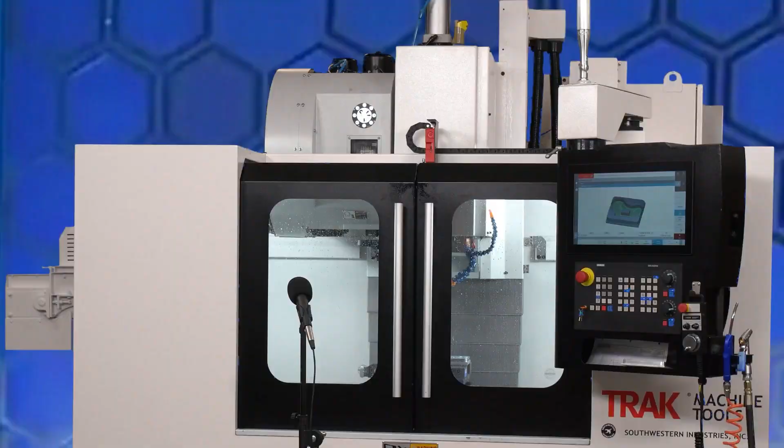We've now reached the start of round 20. If you spell this next word correctly, we will declare you the National Spelling Bee champion.

It's a noun. It's from an originally German word. The word is SINUMERIK.

SINUMERIK. SINUMERIK. That is correct. Congratulations, you are the National Spelling Bee champion.

The storm is coming.

Welcome to the TRAK video event. I don't know how these machines work, but I'm going to introduce you to people who do. Do you mind?

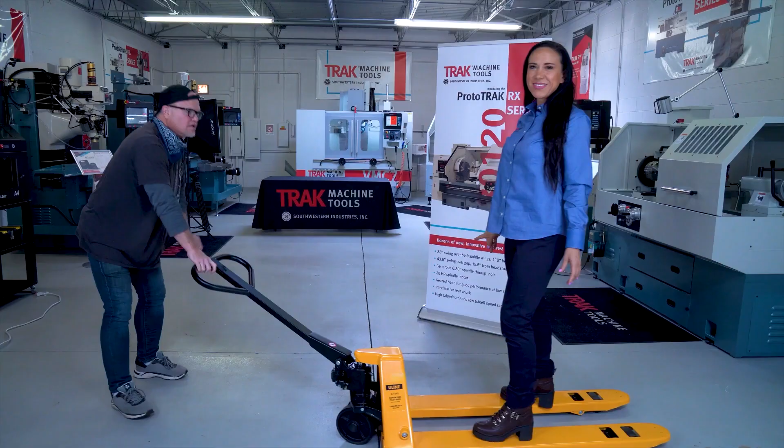Introducing the TRAK VMCsi, featuring the all-new SINUMERIK ONE by Siemens. The world is changing.

From a features and capability standpoint, specifications, the customer is getting a product of tremendous value, and from the time it hits his floor, he will be working with excellent production control with outstanding productivity features. So the customer gets immediate value, and value far into the future. Honestly, I can't say that it makes sense to buy any other product.

I was initially shocked when I heard we were teaming up with Siemens. Traditionally, TRAK has always, from start to finish, made our own products.

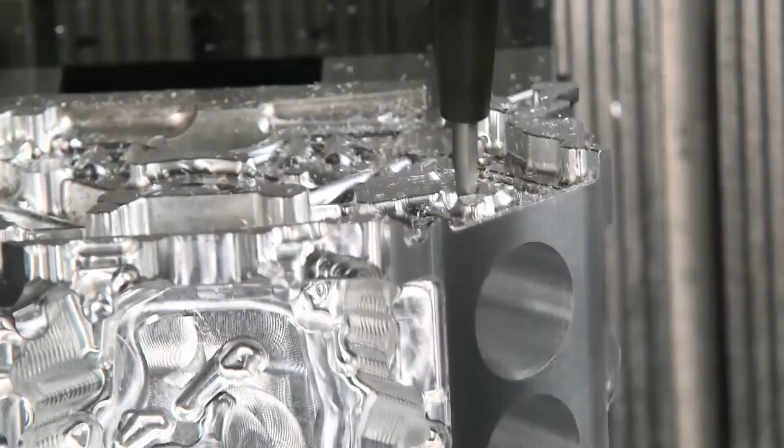When I first found out that we were going to develop and sell VMCs and turning centers with the Siemens control, it was a very exciting time. It was exciting, number one, because it was part of the growth plans that we had had, but more importantly, it allowed us to give our customers a full complement of products, from tool room to production to technology adoption.

The first time I heard it, to be honest with you, I was like, well, what are we doing that for? We have a great control system. We've spent a lot of years developing it. We're all very proud of it. We don't need Siemens. But then I came to understand the market we want to move into is very competitive.

There's a lot of new technologies there. And yeah, we can probably get there, but it might take us 10 years to get there, and we can't wait 10 years. Having that partnership now really opens up a lot of doors for us.

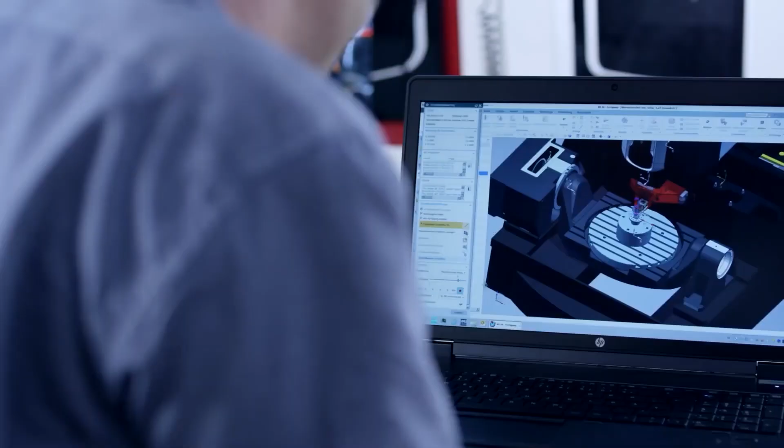Siemens brings to the table the platform - the hardware, the software, the connectivity, the cloud computing - so all that's within the Siemens platform. It's going to be up to us to take that platform and write specialized software from our perspective for our particular market segment, and also create machinery to take advantage of all that.

We at TRAK look up to Siemens as a leader in transformative technologies. Can you tell us about Siemens' vision for manufacturing? Yeah, so our vision for the future is we want to really embrace digitalization and embrace the digital thread.

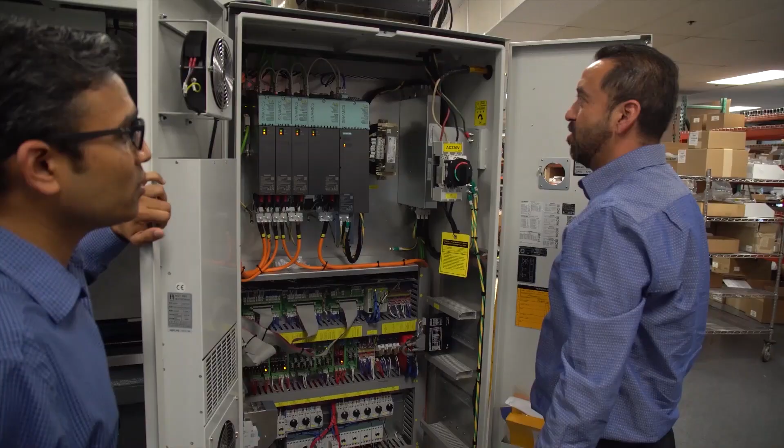It's been an excellent teamwork, excellent collaboration between my team and between Steve's team, coming together really with a mindset to get it done and to meet all the milestones of this project and get these machines launched.

Working with the TRAK engineering team is very rewarding. They're smart guys, eager to learn. They know all the right questions to ask. Siemens as a company, they embrace innovation. So there's always progression, always moving forward in terms of where technology is going.

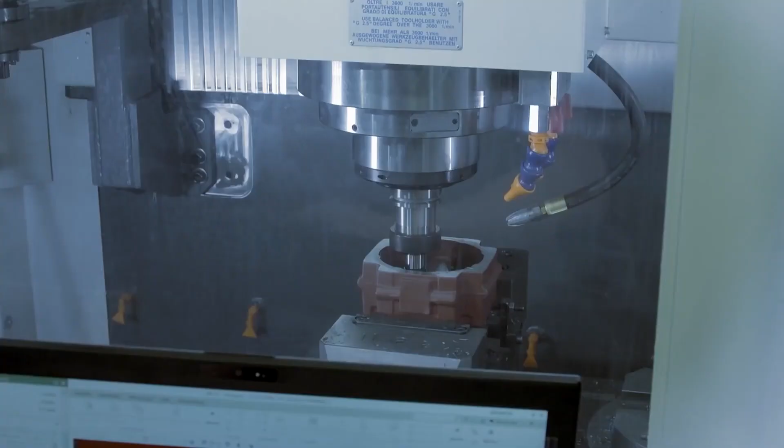So we're a very big global company, over 385,000 global employees. Here in the US, we have around 60,000 employees, around 80 to 100 billion in revenue every year. We've been around for 160 plus years, and we're a company that thrives on technology.

The interactions that I've had with Siemens so far have been positive. They have an extremely talented organization, a wealth of knowledge. I think it's gone very, very well.

Siemens is a big organization. They've got a lot of engineers, a lot of resources, and so I've gotten the chance to work with a number of them. Very smart people. They've helped us along the way, educating us on what their product's all about.

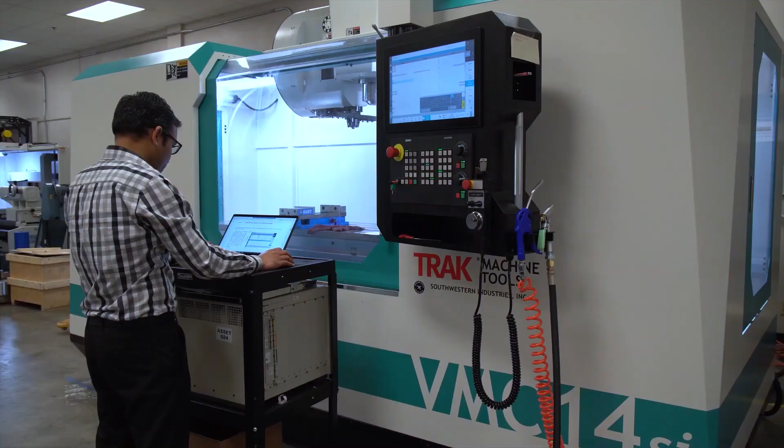I actually had a number of discussions with TRAK 18 years ago, and this partnership between TRAK and Siemens really brought the best out of both companies. To have Siemens backing is tremendous. They're a giant in the industry. I don't know if there's a better partnership we could have.

Back in the late 70s, we transformed our production machine shop from manual machines to CNC machines, and in that process we got an enormous increase in productivity. A few years after that, it became apparent that while we got that productivity in our production area, our tool room area—we had 5 tool room machinists at that time—their productivity had gone nowhere.

They were using the same equipment they had been using 30 years prior. We and our customers face a future where the world looks very different than it does today. It doesn't take a lot of imagination to see that the changes we've seen in photography, music, and retail—these huge disruptions changing those industries beyond recognition—these changes are headed for manufacturing.

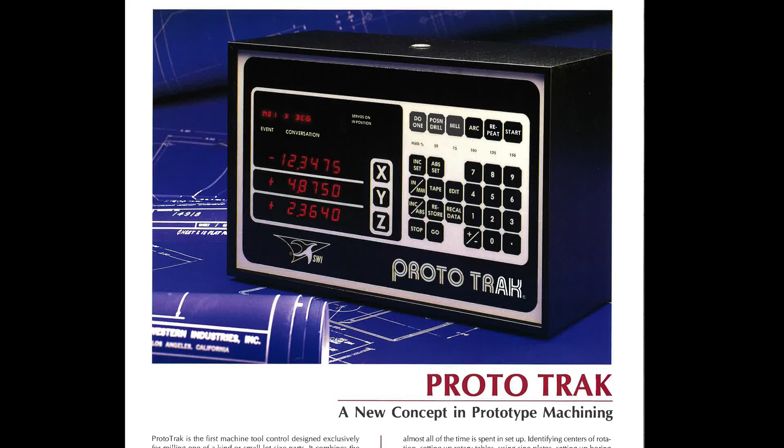What we did was take the CNC technology that had become common in production areas and simplified it, made it much less intimidating to skilled machinists who were mostly in their 50s and 60s, to be able to utilize and embrace it. What parallels to that innovation apply to the initiatives we're talking about with new technology?

What is needed today, and what we can provide, is a transition from the CNC technology that people have today to this new technology of company integration and automation. It's really the same as what we did in the past and continue to do today, except it's just another step—from CNC to integration and automation.

So it's a continual expansion, a continual process. All of these productivity improvements in manufacturing—it's not a destination. You don't get there and then you're there. It's a journey. You have to get better and better as time goes on. That's good advice for anything—it's good advice for everything.

We're here in Cromwell, Connecticut, demonstrating the new Siemens SINUMERIK ONE control on the TRAK VMCsi, featuring ShopMill conversational programming right on the shop floor. Today I'm going to show you how to use the conversational ShopMill programming to program the features of this part.

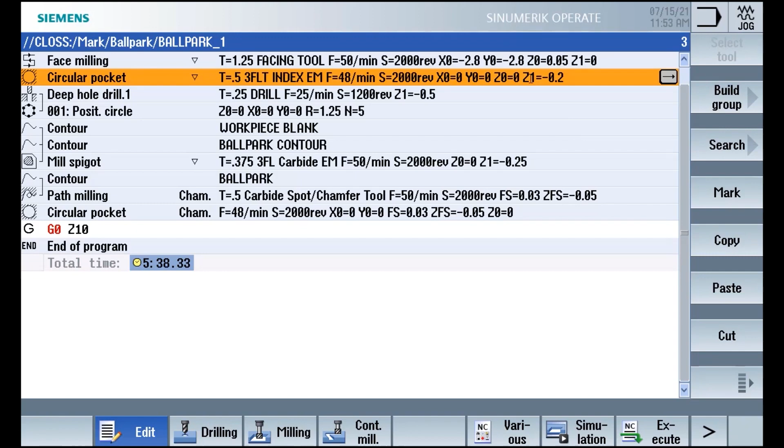Let's see what the complete program will look like when it's all finished. This is the program summary screen—one of the things that makes the SINUMERIK ONE so intuitive. Here you can see all the elements of your program in one place. If you want more detail, just tap the element.

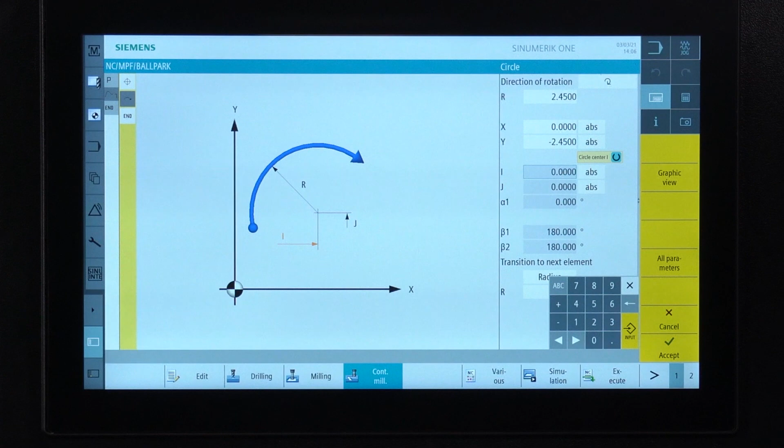Let's see how easy it is to program the features of this part. We're going to start right up at the top of the circle—that's X0, Y positive 2.45. Now we wrap around to the bottom of the arc: give it an arc, choose the direction of rotation, tell it our radius, which is 2.45, give it our X value of 0, and our Y value is negative 2.45. Everything else the machine calculates for me automatically—I can just hit accept.

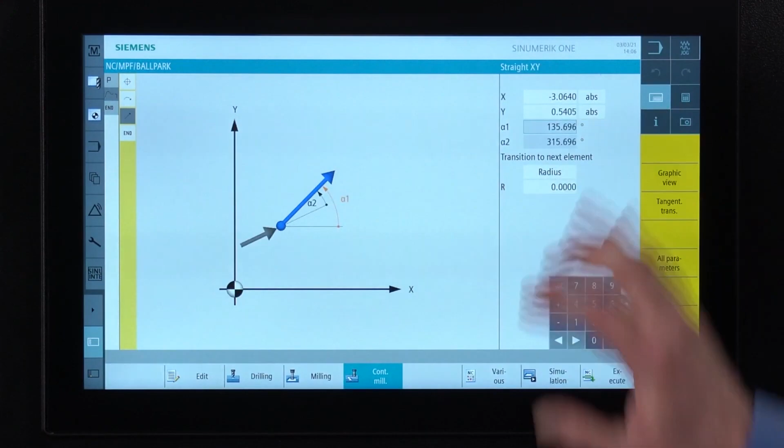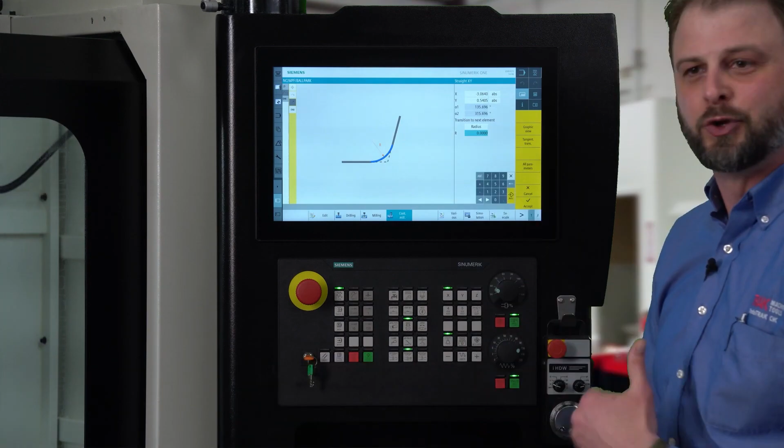Now this line is going to be at an angle, so I choose the angled line, moving over to Y. X equals negative 3.064, Y equals 0.5405. Type that in, and again it calculates everything for us. Enter in the radius—now we're not going to a sharp corner, we need the machine to blend that radius for us. We have a transition to the next element: simply tell it there's an .841 radius, and the machine does all the calculation for us.

Simply draw the last angled line: X is going back up to 0, and Y is going to 2.45. Input, accept—our profile's complete.

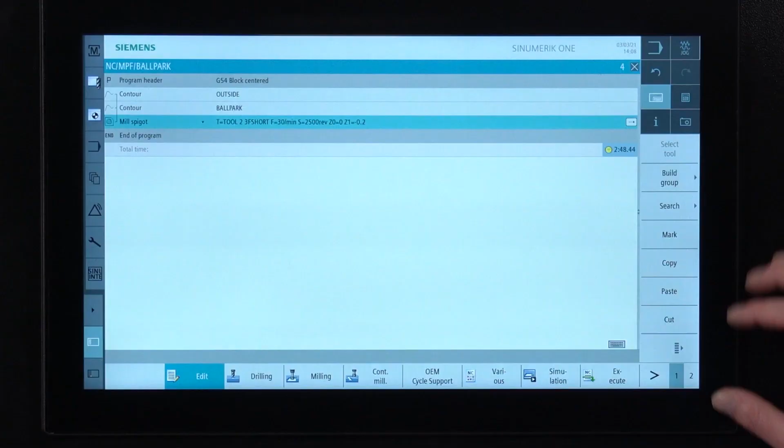Now we want to cut the pocket in the middle while we've got the end mill. So we go into milling, pocket, choose circular pocket, and then choose our tool—we're going to use that same 3/4 inch end mill, already populated in the control. We cut at 30 inches a minute, 2500 RPM, doing rough machining, centric, defining this circular pocket based on the center.

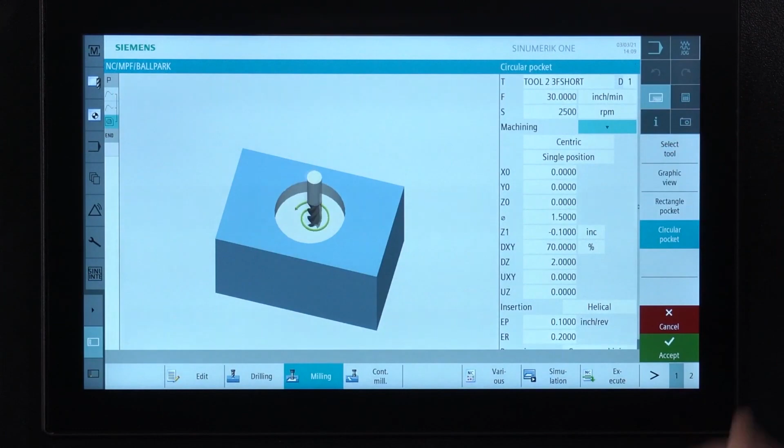We give it our X, Y, Z at 0, the diameter of our pocket, which is 1.5, and our Z1 at -0.1, that's our minus 100 thousandths depth. We go at 70% cutter step over—all of that looks good. We're going to do a helical entry on this where we can adjust the pitch and radius of the helix. And there's our circle pocket.

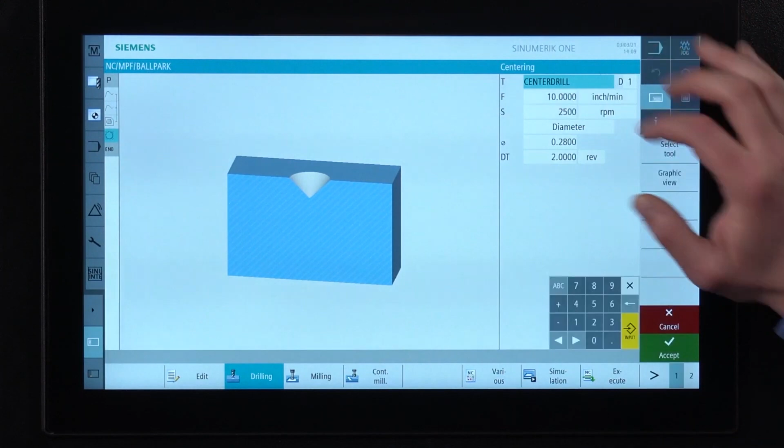Now from here we're going to do our bolt hole pattern. We switch over to our center drill to do our centering—center drill, 10 inches a minute, 2,500 RPM. Now I tell it where we're going to do those center drills: give it a position, simple picture. I pick the bolt hole pattern and simply tell it where I want those holes. Z starts at 0, X and Y right on center. Our first hole is at 45 degrees, and the radius of that bolt hole pattern is 1.25 inches. I've got 5 holes.

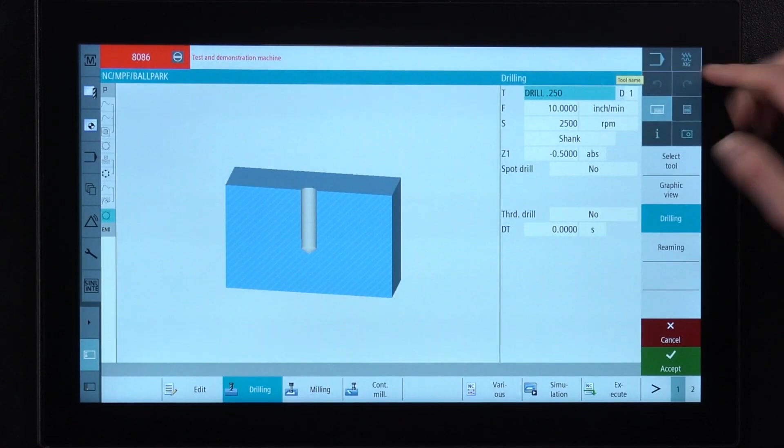So now the last thing we need to do is drill the 1/4 inch holes on the bolt hole pattern. That's as simple as going to drilling and telling it we want to drill. There's our drill 250 right there in the list. 10 inches a minute, 2,500. Now I can do it by the tip or by the shank, so it's going to automatically figure out. I can enter into my tool library what the actual tip angle is, and it will automatically calculate how deep, how much further it needs to go in order to get to the shank diameter.

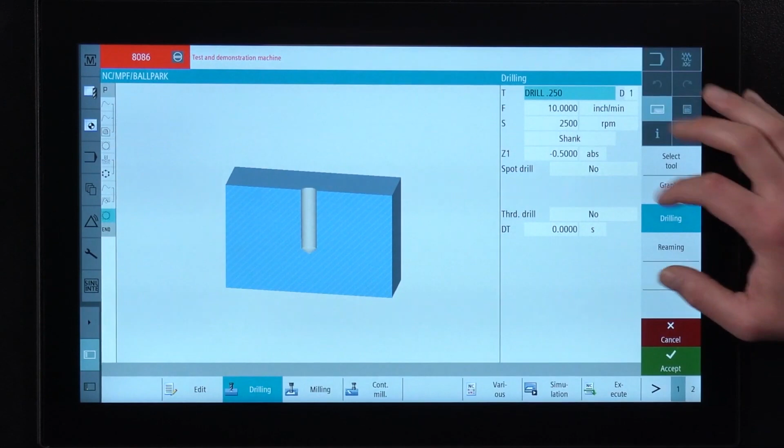So we'll go all the way through minus 1/2 inch, no spot drill. And then I can take this same bolt hole pattern I used for the center drill and simply copy it and paste it below the drilling. And we're done.

Tell us about the SINUMERIK ONE. What does this mean for the Siemens product line? Wow, so the SINUMERIK ONE is a big step forward for Siemens in our capabilities. And it's really the next in a series of controls that have really driven technology in the market. The biggest thing is it's just so flexible. It can do so many things. The world is kind of your oyster.

You can have it run on any kind of machine. It can be configured a lot of different ways. It's very conversational. You walk up to it and it's intuitive and easy to learn. The SINUMERIK ONE was designed as the first digitally native CNC controller, as a virtual CNC controller, and of course as a real CNC controller.

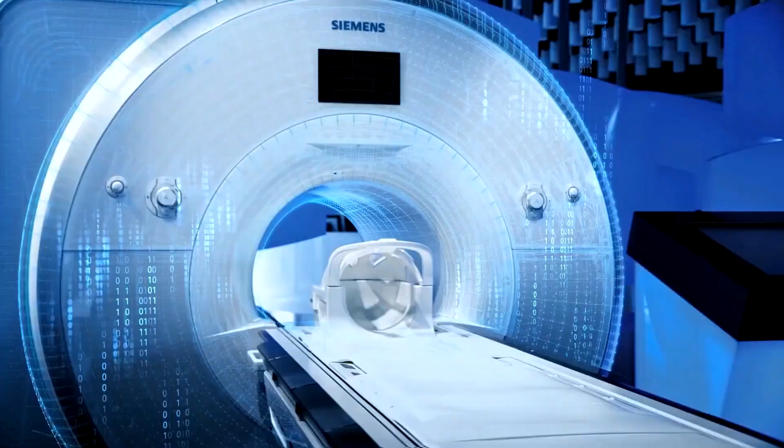Siemens has developed the SINUMERIK ONE to be relevant far into the future in 2 different ways. First, this concept of the digital twin. The SINUMERIK ONE hardware and software has been designed explicitly to work with the digital twin. And this digital twin concept is an important concept today, but it'll even be more so in the future as connectivity and automation and other software products evolve wrapped around this idea.

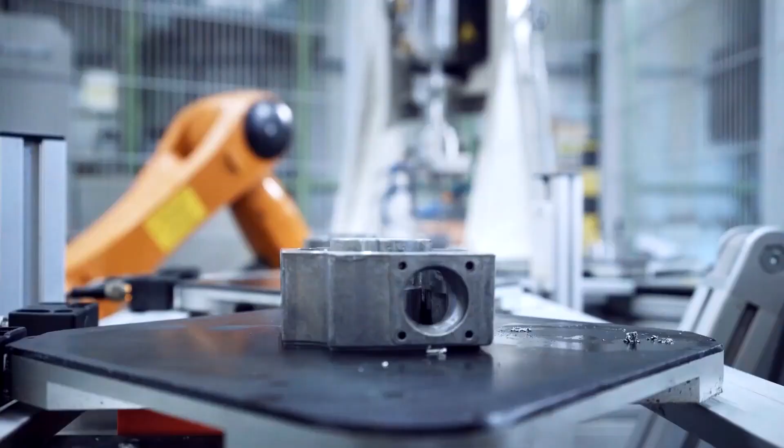It really is an accumulation of 6 decades of development. And if you take the combination of the software optimization and taking the latest generation of hardware and combine those 2 together, you really do get the highest performing CNC controller on the marketplace today.

The key thing that you get with the SINUMERIK ONE platform is access to the digitalization tools. So that includes the digital twin, that includes the MindSphere and being able to access and manage the machines remotely. These are things that are definitely going to give you increased productivity.

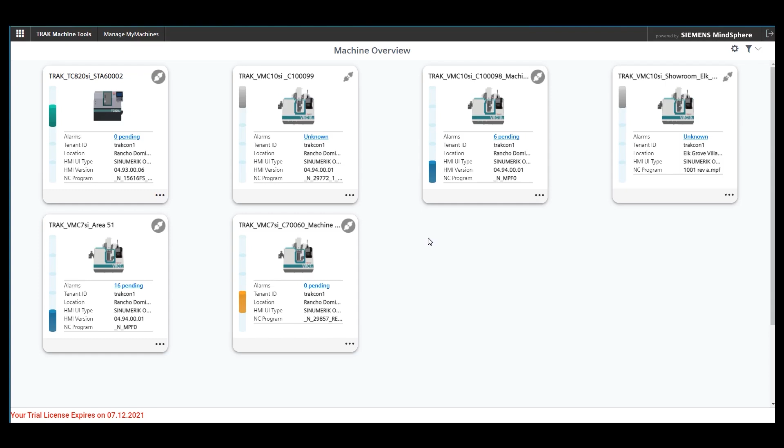Secondly, the SINUMERIK ONE is a relatively open platform, and that means Siemens is going to continue to develop applications, but other developers can build applications as well in connectivity, automation that will work on this control, and we are one of those developers. We want to push the envelope of what is possible, and we think that's really what's been driving advanced technology.

And the SINUMERIK ONE is really doing that, especially in the digitalization portfolio or the Industry 4.0 world. It's allowing us to incorporate functions that traditionally couldn't be in a CNC control in this new open platform.

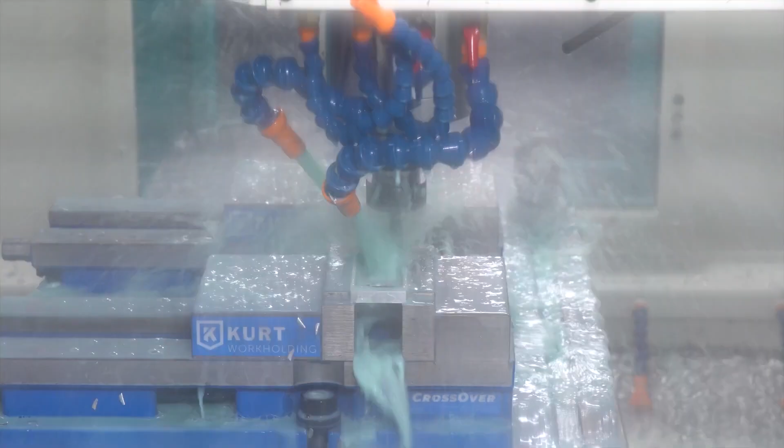On the machine side, the main thing is simply performance. We bought one of their controls 15 years ago. We have a test program called the Ball Bar, and it had the best result I've ever seen. And I've checked our own equipment, I checked some of our competitors' equipment, and it was like the best one I've ever seen. And so when the opportunity came up, I said, you know, if we go with Siemens, I already know what I'm going to get for machine performance.

What Siemens does is it has a very innovative approach where we look at polynomial curve fitting. And what that means is we can take tens or hundreds of points, put a high order polynomial through there, and then instead of processing 100 blocks, you're processing one algorithm. It not only decreases the amount of data that the controller is trying to process, but it also smooths out the paths. So you get better surface finishes, and you also get reduced cycle times.

It allows parallel design work. For the machine builder, they can do parallel engineering. For the end customer, they can do parallel part programming or parallel resource management.

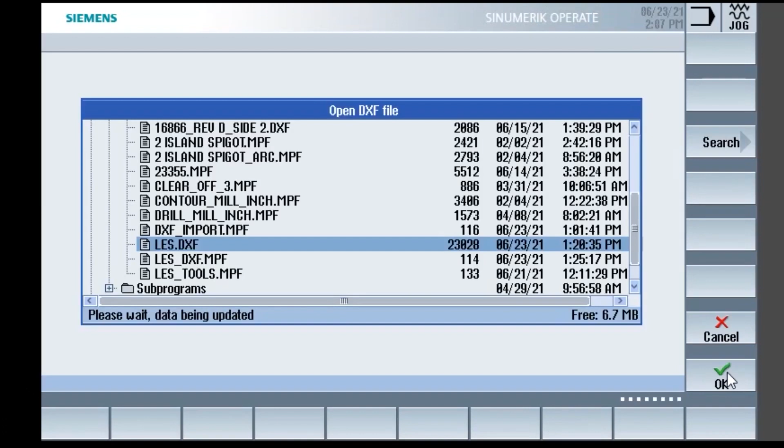Most controls give you one way of running the control, one way of doing a task, so the consumer has to fit their process to how that control works. In the SINUMERIK control, we give you a bunch of different ways to actually apply the technology. So we allow the control to adapt or fit to the customer's processes, not necessarily making the customer fit into our box.

Now that we've done a little bit of conversational programming, let's take a look at CAD/CAM based programming. We're going to do a 3D surface cut. I posted it from my CAM system, and it's sitting on our USB device. We're going to go and take a look at editing, but I'm going to leave it on the USB device the whole time. So not only can we edit on it, we can actually run directly from the USB device.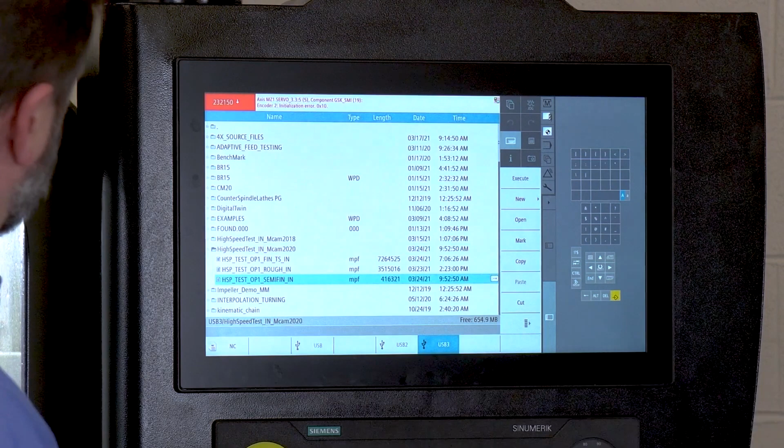Come over to your program manager. We'll see our local storage, and then you'll get your USBs. So when you come in, we're going to open it up and edit it just as if we were programming or using a file that was sitting on internal memory. So find the program you want, just hit the little arrow, open, voila, we're in.

So I'm looking at a G-code program, but the screen looks almost identical. My horizontal and vertical soft keys look identical to Shopmill. Absolutely, so intentionally we wanted to keep the placement of all the functions in the same exact point. So from a new user learning perspective, they're not going to have to learn a brand new layout just because I'm in G-code. So if I wanted to mill a pocket, I can go to milling, go to pocket, and you notice it's exactly the same.

Not only is it exactly the same, it's conversational, right? So our G-code is actually a hybrid, it's conversational and G-code combined. So here you could fill out that page, an end user could drop in some numbers and actually modify the G-code file from the control.

Okay, I'm looking down here, I'm seeing that we're at line number 22,307. Now, but the program doesn't look that big. Right, I mean, we look at it, we're like, well, it's barely a page of data. Boom, there's our M30.

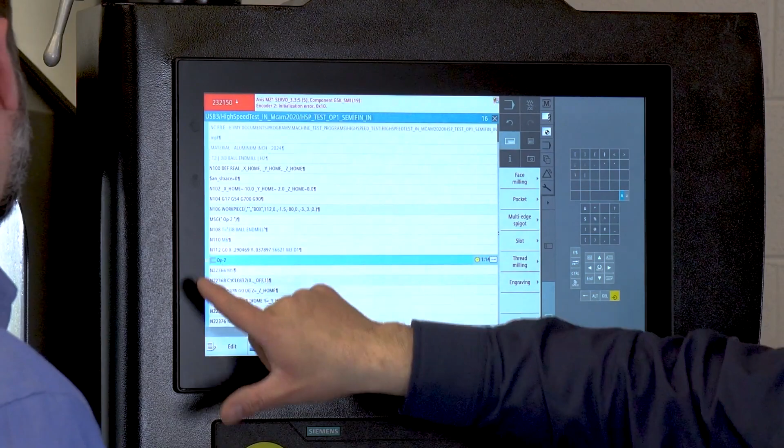So one of the things we like to do is we like to use these group commands. Now you can use groups in Shopmill, we can do it in G-code, or you can even have the post do it. And what I do is I like to be able to add or subtract large chunks of code from my CAM system.

So like, what do you really want to know? You're an operator, you walk up to the machine. Do you care what's happening on line 3022? Absolutely not. So what do you want to know? I want to know my work offset coordinates, my speeds, my feeds, my tool that I'm using. So we put that up right outside the group, so I can get a quick snapshot and see multiple operations all on the same page.

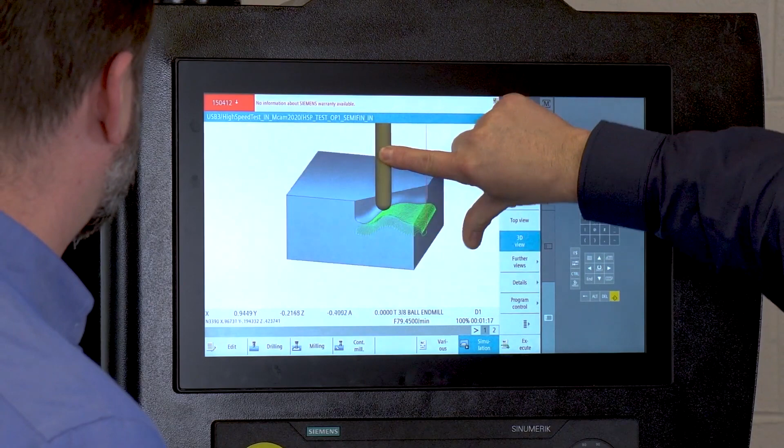Then if I want to get into the meat of it, we certainly could. When we're in 3D, this is a touchscreen, you'll notice I'm hitting the screens. So not only is it a touchscreen, it's a multi-touch screen. Just like that cell phone you got, I can come in and do 2-point gestures, I can rotate, spin, or use a single point to pan. So we have a whole bunch of organic functions that most users are already used to, because it's just like they're interfacing on their phone and their tablet, but here it's at the CNC.

It's important for us to set up the technology in something that's really common to people. We like this concept of applications, so we add in all these cycles almost like it's an app. Right, we added the touchscreen functionality. Yeah, it's just intuitive.

Now, even in the editor, we added some of the multi-touch functionality. So here I can kind of scroll and move around the part. But I have, as you saw before, 22,000 and something lines. Yeah, finding something in there is going to be a nightmare. Well, what if I want to get to M30? Maybe my retract is not where I want to put it. Sure, well, that's only at my M30, right? So that's always a pain.

How do I get down there? If I use 2 fingers, it will page up and down a page. If I use 3 fingers, we'll go right to the end of the program or the beginning of the program. So we just spanned

22,376 lines in the swipe of 3 fingers. That's terrific. And then if I'm looking for specific tool information, I want to jump between all my different tools, check my speeds and feeds. I see a search button right there.

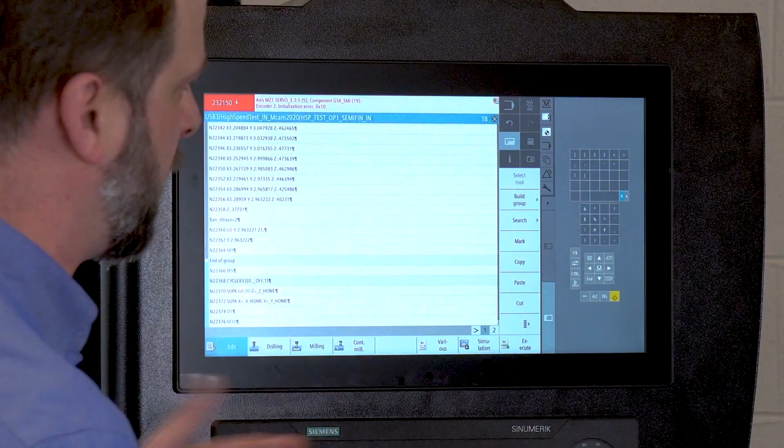Absolutely. Search does 2 things. Allows me to get to some text or data that I know I want to find, maybe a T or an M code. But I can also do search and replace. So you got that program down from the CAM system, what do they always like to do with feed? Program feed everywhere, right? You got 1,000 feed commands. How do you edit that at the control? You normally can't. Find and replace, boom, it updates all 1,000 feed rates and away you go.

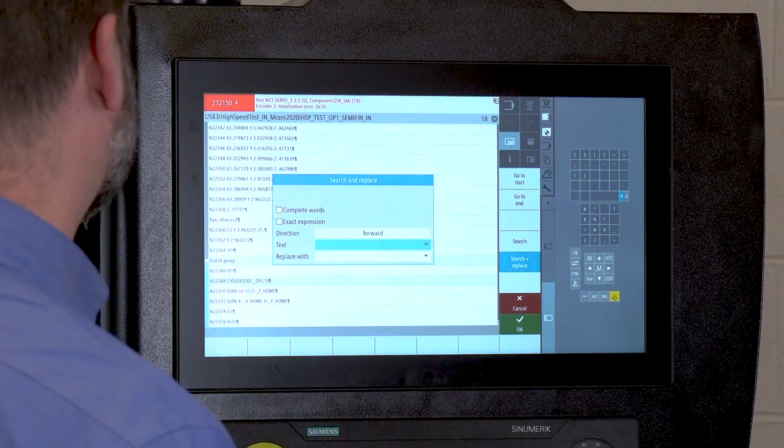My name is Pat Fitzsimmons and I am the West Coast Regional Applications Representative. I'm better known around as Tracking Pat, which is kind of my stage name now. I've been with the company for 23 years.

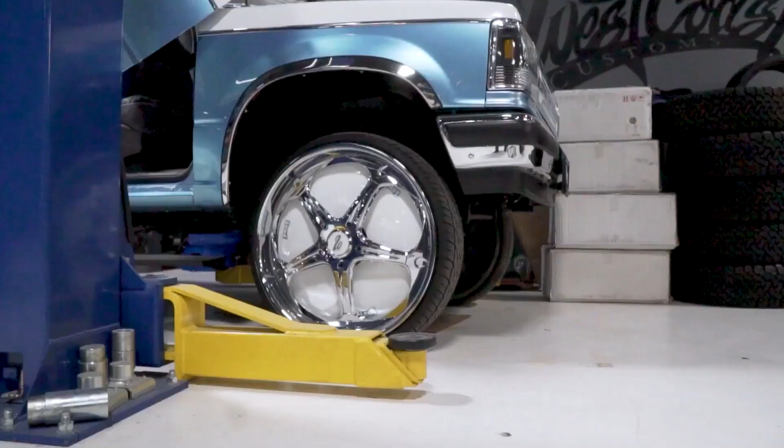When I'm at a trade show and people actually recognize me from the YouTube video, it is kind of exciting because they'll come in and want to talk to me first and thank me for the videos and tell me stories about how they've really helped them. So that part of it is really, really exciting. When you get that opportunity to call on someone to help someone, you build a relationship. When you see somebody like that you haven't seen for a while, but you know they've benefited on the things that we've done for them, I enjoy what I do and it makes it really fun.

And at TRAK, they let me be me. Don't forget, keep on tracking. And cut.

That was good, Pat. Of course it was.

The world that we live in now, manufacturing, is getting more and more complex every day. And we know that our customers need a partner that can help them navigate these complexities as they move forward. Working with their sales organization, it's not at the end of the day, you know, if I can sell this one machine into this customer. It's really, can I be a partner for this customer? You look at the history of TRAK and how long that company has been around, innovating and taking care of their customers.

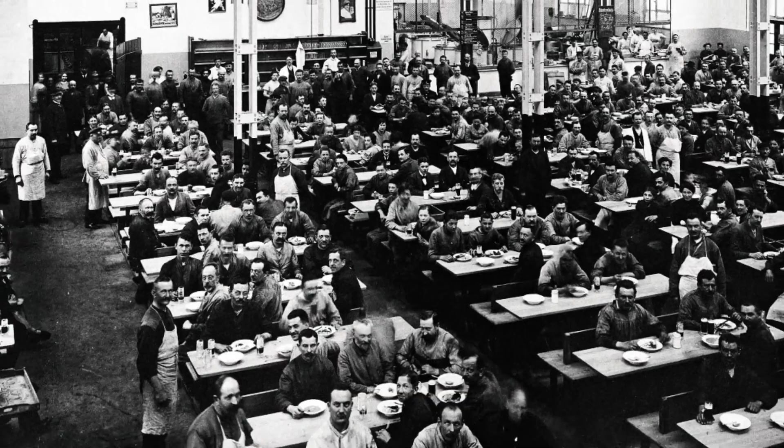From field service and sales to manufacturing support, service is key. So if you're shopping for capital equipment, obviously one of the first things is, what's your service like? TRAK Machine Tools, one thing that definitely stood out to me immediately was their focus on service. They have a very extensive service organization and they believe that following through on their service of the machines is what creates their reputation and keeps their customers loyal.

As a sales support rep, I get to work really closely with our sales reps, and they are all an incredibly knowledgeable group of people who really, truly do care for their customers and everyone that they really get to interact with when they're representing TRAK Machine Tools.

We've got very good training programs. We continue to build on those things. There's some gentlemen behind us in that room over there that are doing nothing but writing technical documents, procedures, things like that. So when we bring people on, we have materials to give them, because we do have a wide range of products. The Siemens now adds to that. And so we've got to be really organized to be able to present that and give that to everyone else.

What application support does Siemens offer its customers? So Siemens has a vast staffing here in the US. We have well over 100 employees that are supporting all segments of our business space. Certainly from service technicians based throughout the United States that can be here to aid TRAK. We have applications engineers for the physical programming and operation training of the control. We have a full staff of engineers that actually will help integrate the product to the machine tools.

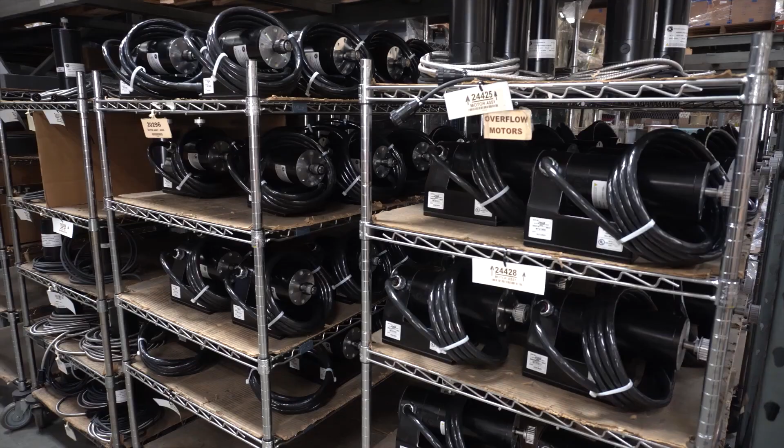We've gotten some feedback that Siemens customers have been disappointed with spare parts deliveries in the past. How will this be different moving forward? Between TRAK and Siemens, we're going to come up with a program for guaranteed parts availability for their specific machines, so that we can offer world-class support and world-class availability of spare parts for these machines.

We have several showrooms across the United States. We realized that the industry was having less and less trade shows, and we were unable to get the reach that we wanted through trade shows anymore. We also recognized that it was in our customers' best interest to see the machines and have us do demos on them live before they made their purchases.

We've been doing it for a long time, and the fact that we support products that are from the beginning of the company says a lot about our customer service, I think.

Skilled, talented, driven individuals work for our organization. They're true believers in our product and the impact that our product makes on our customers. I really think that TRAK believes that their customers are part of their family. Every person in the company has a role in customer service.

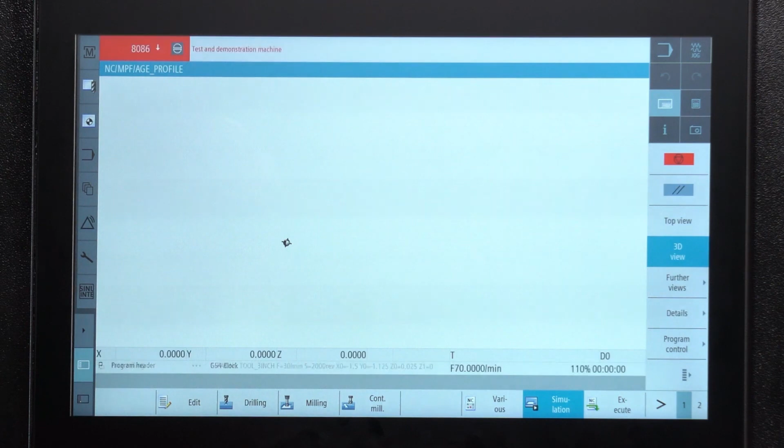So if I go to simulation, you're going to see on here that it's going to actually show me the part as if it's being made for real, okay? So in here you see my block, and you can see that my facing tool's coming in here and wiping out the top of it, right? And then it changes to my 3/4 inch tool, and in here it's doing that first spigot where it's cutting it down to the actual size of the outside, okay?

Now it's doing the pocketing part of it, so it's removing the material except for the island. And you'll see that this actually happens in 2 passes to get to my final depth, right? So once it gets it cut out completely here, then it's going to come back and do a second pass like you're seeing right now.

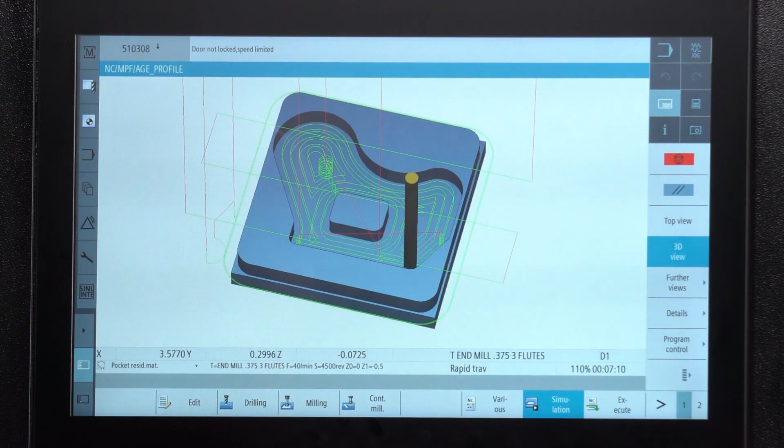Now once it finishes taking the major part of the material out of here, it's going to switch to a little bit smaller tool so that it can get sharper corners on those inside radii, which is what it's doing right now. That's called residual machining. Once it's done with that, that same tool is going to take a final pass to clean it up to the exact size, and then it's going to clean up the floor of the pocket, okay, and that's what you're seeing right now.

Once it finishes here with the floor, it's going to actually change to a chamfering tool, and it's going to knock the edges off of all of the surfaces. So off the island, off the pocket, and then off the outside of the part, and that's what it's doing right now, around the outside like so, and that's the completed part.

You also have real-time simulation, and real-time simulation is a link one-to-one scenario. So as I watch the tool, we'll probably throw it in 3D, that always looks a little bit interesting. We see the cutter, we're taking a look at it. I'm gonna come down and approach.

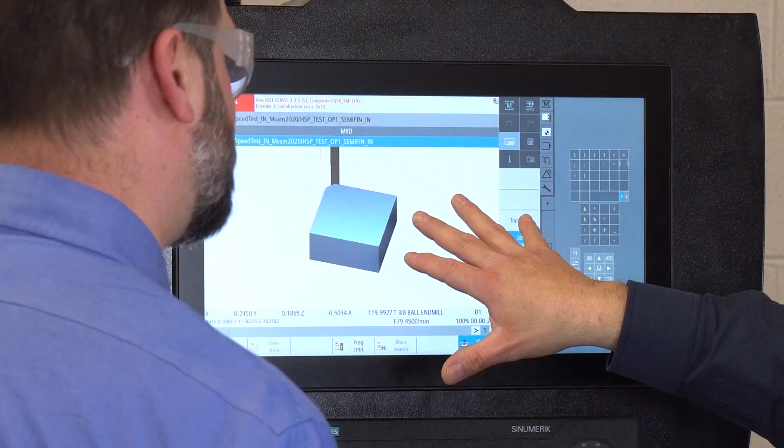There's the tool. Watch what happened. I stopped the machine, it stopped. Right, it stopped. I tried to put the gas on. Still have my XYZ readout right there. I can see what's happening right here in real-time simulation.

We can still manipulate different points in the view window, all right? I can zoom in. Now you'd say, well, why do you need that, right? I can look through the window, there it is. And we happen to be running dry right now, right?

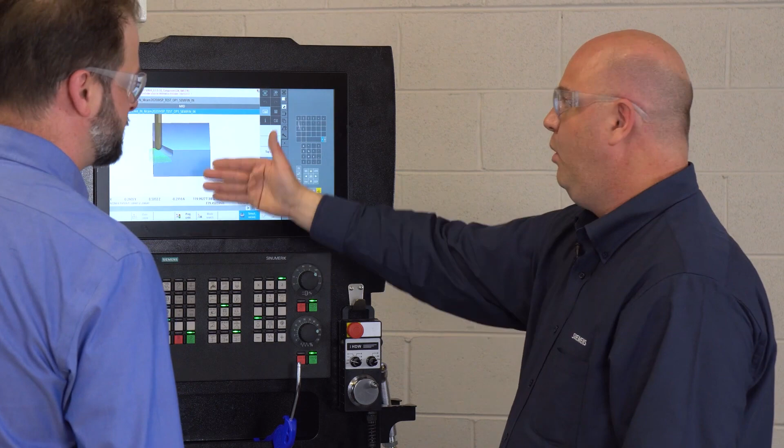No big deal. You activate coolant, can't see anything, it's just coolant everywhere. That's what we want. You know, these higher performing machines, they have some really big coolant pumps. So this, at least I can see not only where I'm at, but what's coming up in the future. So I know, okay, I haven't gotten into the pocket yet. That's going to be coming down a little later.

I'm going to go in and actually find the material, all right? The way that I'm going to do that is, like I said, in here it says measure workpiece. And just so you know, I've already touched off the top of the part, so I'm just going to show you how it touches off the sides and finds it. So there's different shapes in here and different places that I can call my zero point on my program.

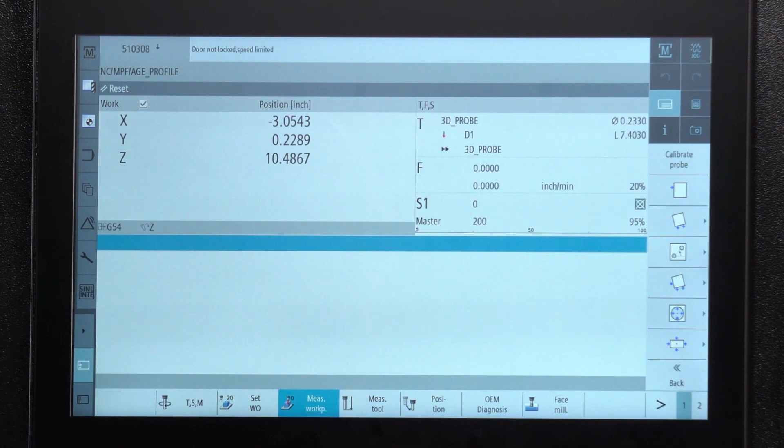But my actual zero point needs to be off of a right rectangular edge, okay? So if you can see on the screen here, it's telling me I basically got to touch three places with this probe and it'll figure out where it is. Before I do that, I have to actually tell it what I want that corner to be when I'm finished. And that's where I'm saying my X dimension is -1 3/8 and my Y dimension is -1. Okay, so once I do that and I'm ready to go, this illustration is telling me where to touch the material.

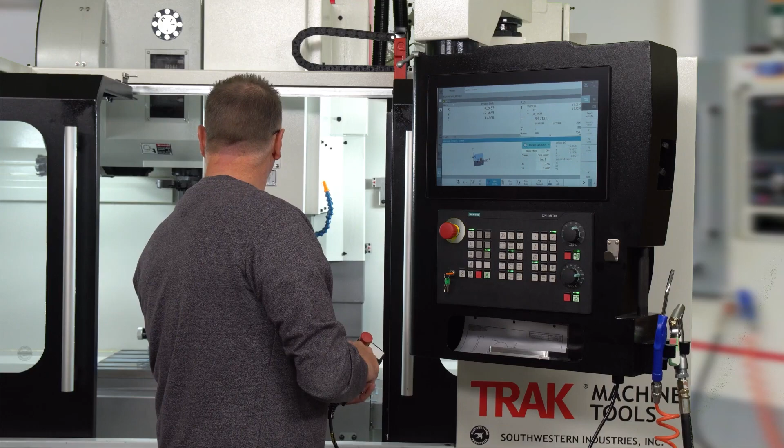Now I've got a handheld device in here that allows me to move the machine around. So I'm just going to come down here in the Z axis and get close. Then I'm going to move it over a little bit here in the X, and then in the Y to get myself in actual position. So you'll see it's asking me to do that. I just push go and you're going to notice that the probe lights up and then it's going to move over until it touches it. And when that light flashes red, it knows where that point is, okay?

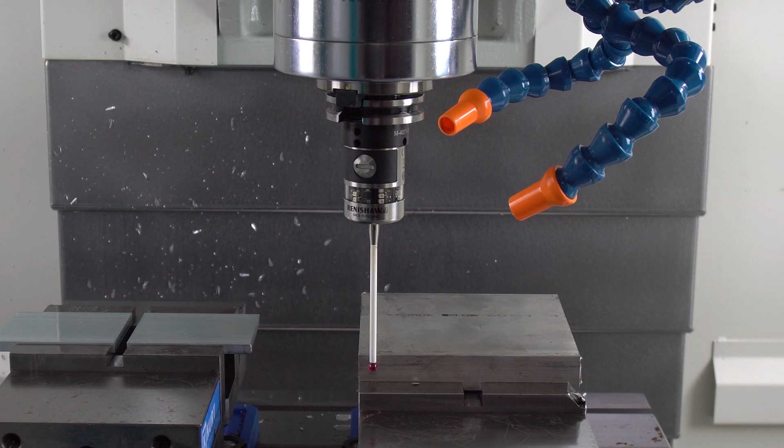Next thing I'm going to do is I'm just going to move it over to the second spot. Push go again. It's going to do the same procedure. And then the last thing it wants me to do is touch the opposite side of the part. Now the reason why it's doing that is so that if the vise wasn't perfectly square, it's going to know that by the way it touches the block, and it'll still cut the block square even if it's skewed.

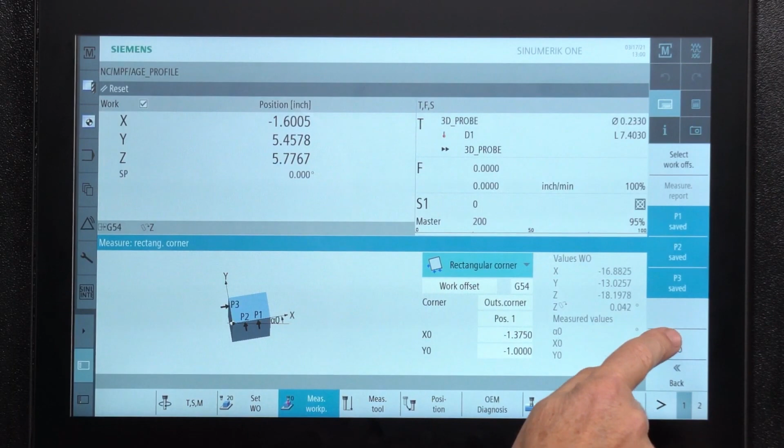Okay, so now that I've touched all those positions, I'm just going to move my probe out of the way here a little bit. Like so. And then here on the screen it says set your work coordinates, okay? So I'm just going to push that button and it's going to zero those points out so it knows exactly where it's at, okay? And now I'm ready to make parts.

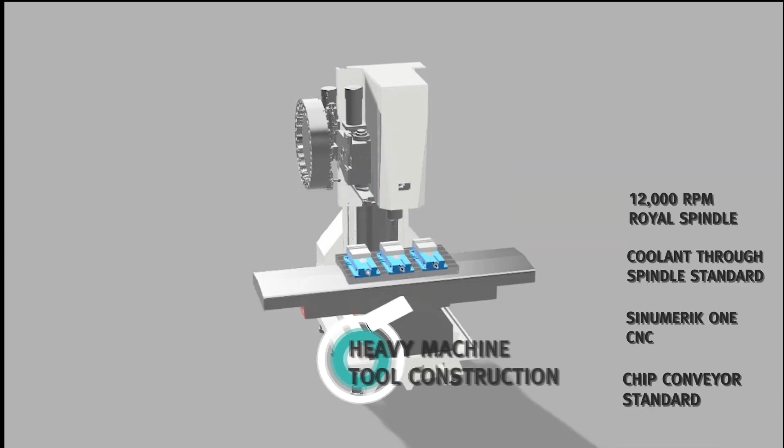The design elements of VMCsi: the rigidity is one of the main reasons why a machine is more precise. The main element that is different from other machines that we make is that it uses roller type linear bearings. They attenuate vibration. They require more precision to make the machine run, but they reward you with the stiffness, the rigidity, the accuracy. We preload and pre-tension ball screws. That gives us zero backlash capabilities.

Well, the customer can expect higher productivity, higher quality due to the higher rigidity of the machine, and the spindle RPM and spindle horsepower will allow for heavier cuts, faster cuts.

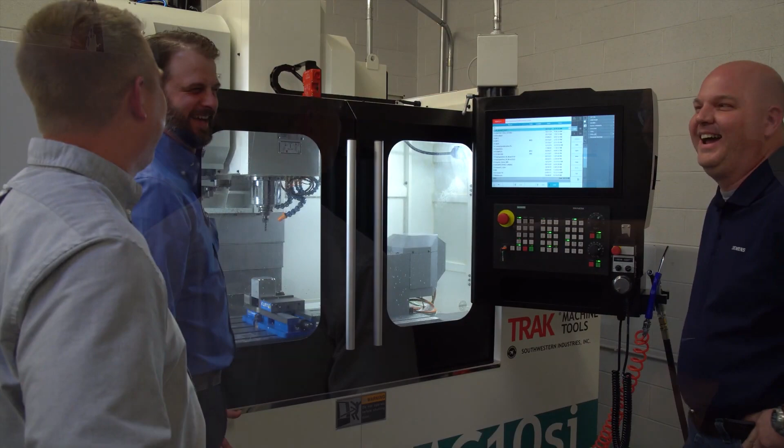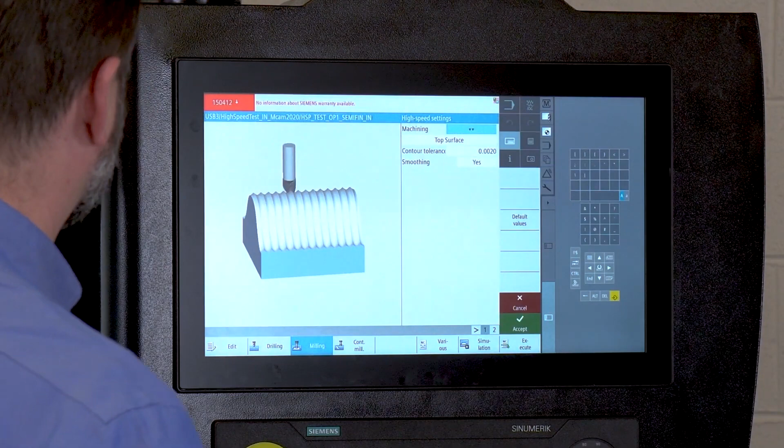Now watch this. So you see that cycle 832? Kind of looks like a little bit of a weird cycle, right? So here's a perfect example of a cycle that was posted from a CAM system, dropped into our control, and it's fully conversationally supported. So if I have to do a quick tweak, I can change my chordal distance, change my strategy, hit accept, boom, I'm running. Don't have to worry about the programming department and downloading those guys.

Tell me, so this is high speed settings, this is cycle 832. What exactly are we adjusting in this? So this is a little bit of the Siemens magic going on. All right, so this is our high speed functionality.

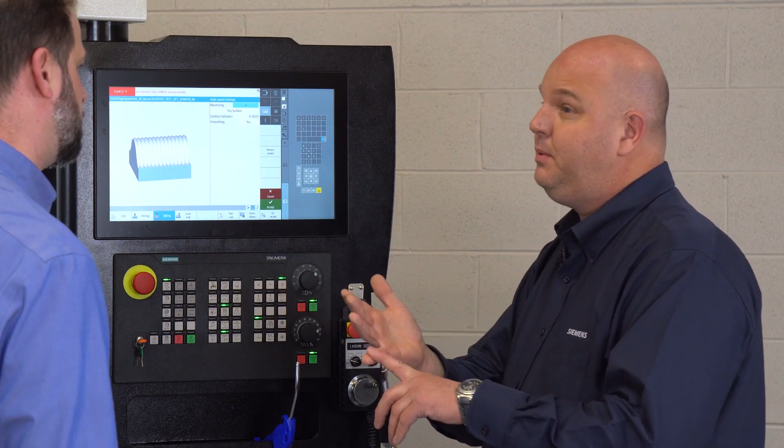What the control has the capability of doing is taking the point cloud data that comes out of the CAM system and actually transposing a spline through those points and running the spline. So what it does is it gives us better control of our velocity as we roll over a surface. We can maintain a higher rate of speed, and speed is directly going to affect cycle time.

To give you an example, this part we've benchmarked in two different scenarios, with and without high speed. We had a 30-minute cycle time without, and a 16-minute cycle time with. Almost a 50% saving in cycle time just by turning on that cycle, and with a better surface finish, significantly better.

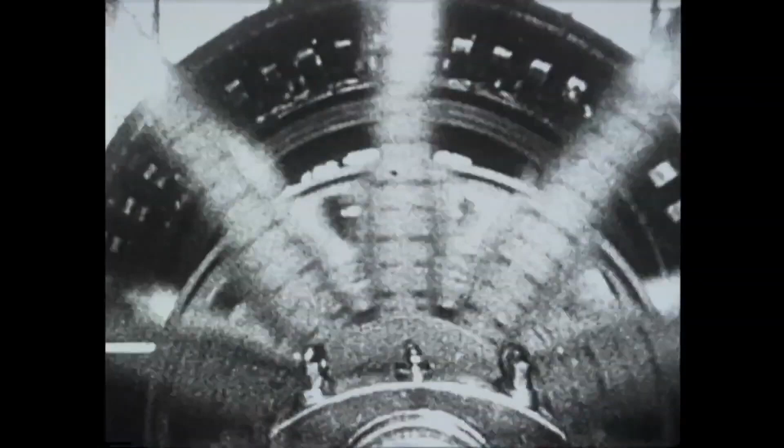Industry 4.0 is all about the digitalization of the future of companies. Industrial revolutions happen once every 100 years or so, featuring paradigm shifts in the way human beings manufacture. These quantum leaps are propelled by astonishing technological breakthroughs, which in turn dramatically change the way people interact with the machines that make stuff.

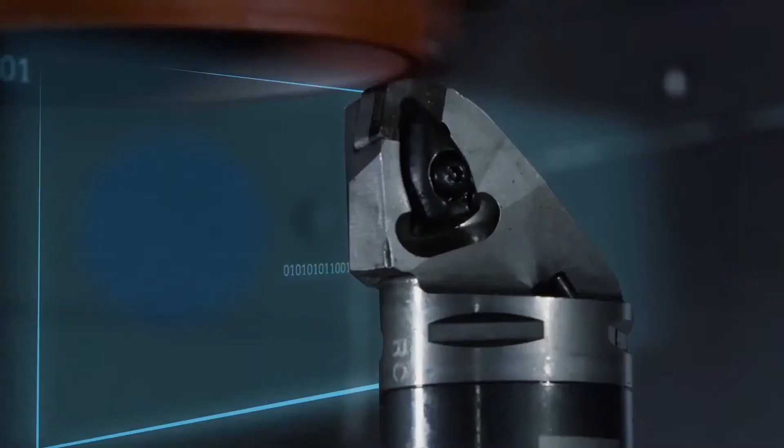The introduction of robotics and all of the Industry 4.0 sectors that are really coming together to create this new shop environment, it truly is a completely different world. Technologies which not long ago were considered the things of science fiction suddenly become not only real, but are so quickly adopted. Automation through machines, all the software that talks between the machines, all that stuff is part of this Industry 4.0. It causes us to think out loud: what were we doing before this?

Transformative technology your shop can use.

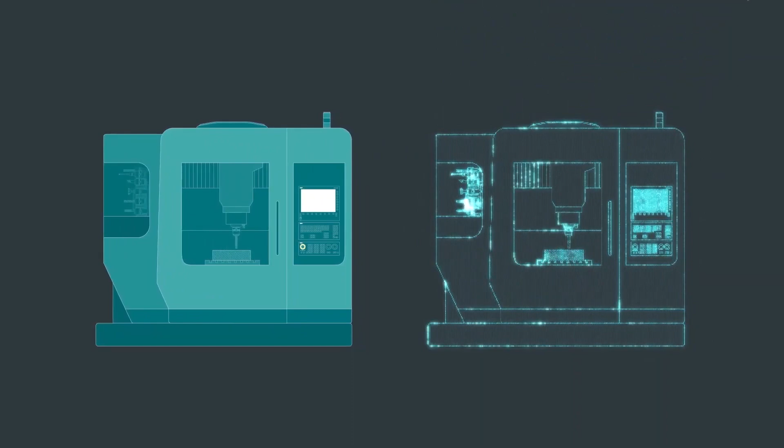Digital twin is taking the machine you see behind me and having it fully modeled up in a computer, with all the signals, all the inputs, all the outputs, everything digitalized. Oftentimes if you take your part down to the machine and it doesn't quite work right, or you crash it, you're down, you're not running parts, you're not making money. Digital twin is simply a software representation of a piece of equipment, and allows many different people and groups to participate in the development without having to have that physical piece of equipment reside on your site. You can now take this digital twin and be very confident everything's working correctly, and then go down to the machine and actually physically make the part.

Digitalization, virtual twins and digital twins really improve time-to-market for the machine builder, but also for the end customer.

Could you explain the digital twin to me a little bit more? What are the benefits to customers? Digital twin... virtual part... I should probably know what that is, right? The digital twin offers... I wonder what that is. Alyssa explains the digital twin.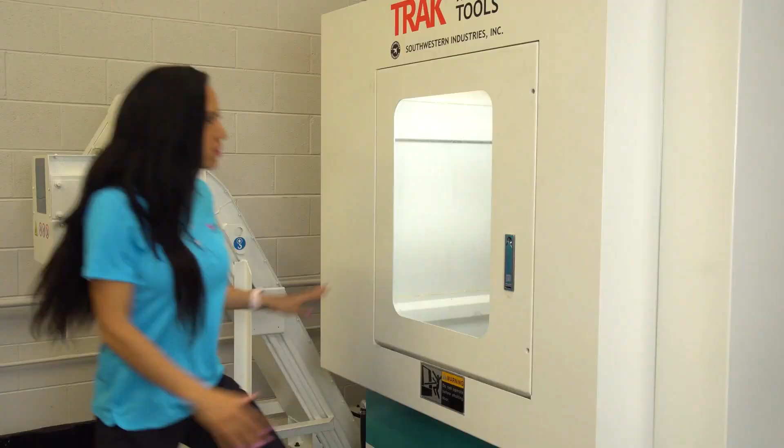And action! Digital twins are nothing new. Everything on a computer is digitized, and when that something digitized is meant to represent something in reality, that is a digital twin. For example, this drawing is a digital twin of this real part. These days, digital twins are being used in all kinds of ways. This picture of me is my digital twin, and I can use it to see what I may look like in different hairstyles or clothes.

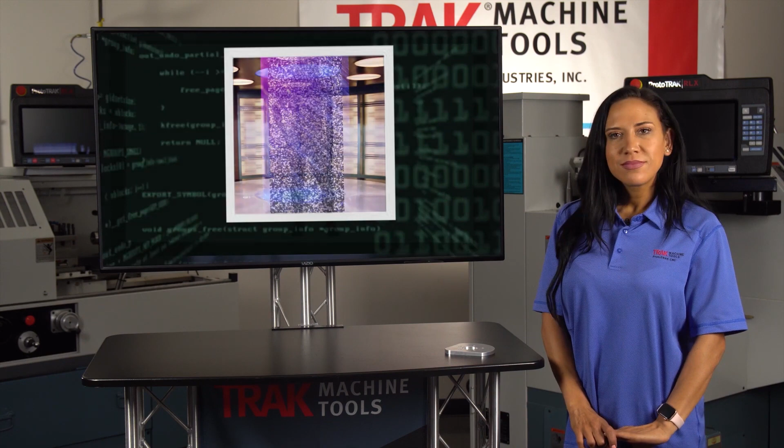Hi, Alyssa. Oh, hi, Alyssa?

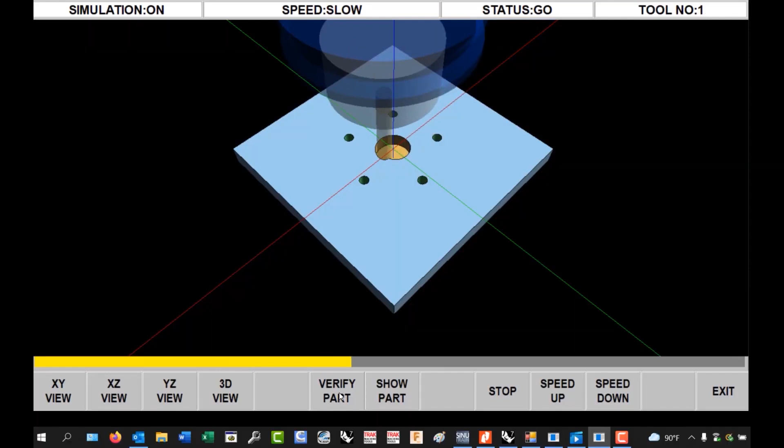When you use the Parasolid feature on your ProtoTRAK, you are using the part's digital twin to make it easier to program and eliminate mistakes by loading the data in directly as the part was designed. Our Verify feature gives you a digital twin of both your part and your tool. This visualization gives you the benefit of seeing how the part will be machined and spot possible problems.

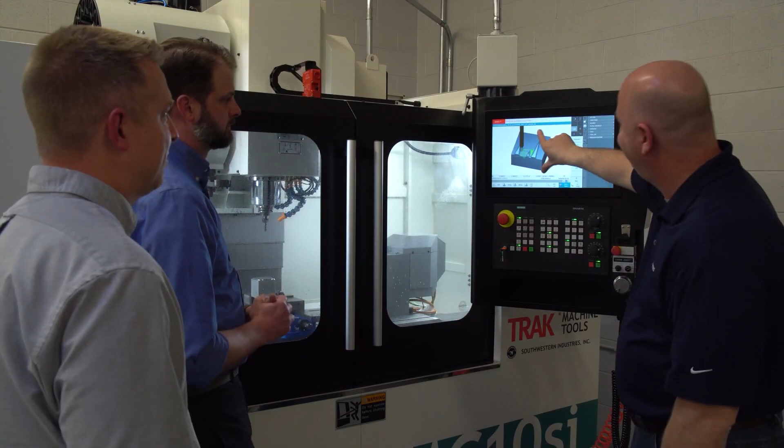Pretty cool, huh? But as good as these benefits are, it gets even better. Siemens has taken this digital twin idea and extended it to incredible proportions. They've invested millions and millions and gazillions of dollars, the efforts of literally an army of top software programmers, into a process they call digitalization. Digitalization is the power that happens when you take your work and transform it into the digital world, using software and computer power to your maximum advantage. This transformation can really help you.

How? You can create digital twins of your machines to monitor what is going on with those machines in real time. You can simulate your plan and experiment with fixtures and toolings, adjust your programs, and play with the sequence of operations. As you get better working with your machine's digital twins, you'll be able to optimize cycle times and quality.

You'll be able to set up the next job in a fraction of the time it takes to set up and optimize that job on a real machine. This in turn will allow you to keep that machine running at its highest imaginable output, day and night if you want. But what about that extra wear and tear on the machine? Won't it break down more frequently?

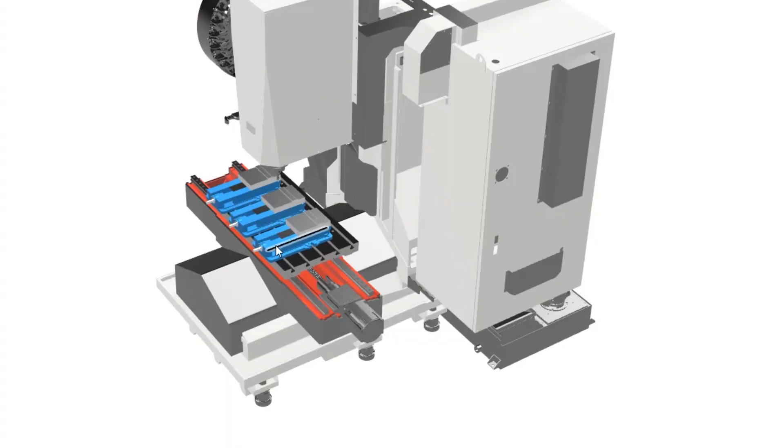Good question. There's another benefit of the digital twin. You know how a bearing makes a terrible squeal sound that tells you it's going bad? Well, it turns out there are a lot of those telltale signs throughout your machine. Your digitalized machine will compare itself to its digital twin in real time and tell you what is going wrong so you can prevent a crash or a tragic shutdown.

It's easy to get excited about all this, but it's only the beginning. As that army of engineers working at Siemens gets better at their work, and we get better at making them work in your shop, we can expect some truly amazing things. We're talking about things like artificial intelligence and augmented reality. Imagine getting all that working for you. Those buzzwords aren't just for someone else, you know. Think of this along with your ingenuity, experience, and knowledge of your customers' needs. The sky isn't even the limit for what you can do.

As soon as you get your first TRAK machine featuring the all-new SINUMERIK ONE CNC, you are on the path to having the latest technology. It's what we call the path to Industry 4.0. Digital twins and connected machines will become key assets for your shop.

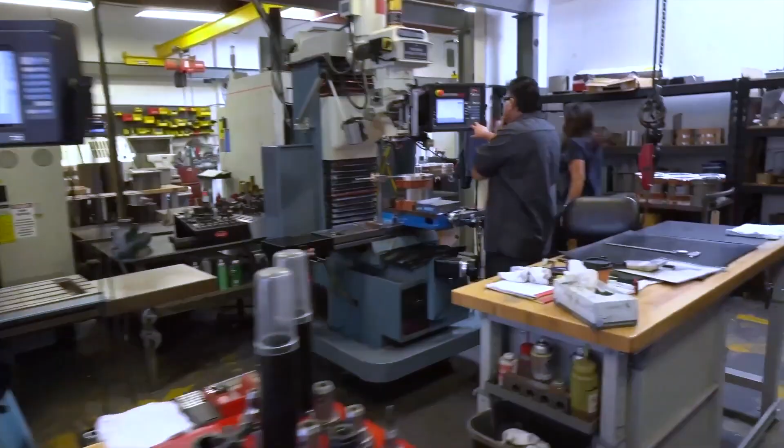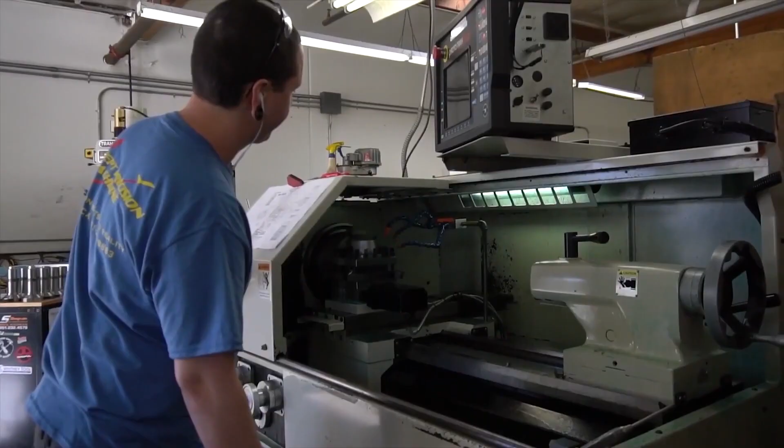So what about those wonderful ProtoTRAK machines? Well, that's a good question, Alyssa. As it turns out, those ProtoTRAKs have been doing digitalization all along. Because when you use a ProtoTRAK, you are digitalizing work that was previously done manually. Over the last 3 decades, we've learned how to help tens of thousands of machinists with what Siemens calls digitalization. As these applications develop, we'll be the first to bring the best ideas to the craftsmen. And women. Of course, and women. Everyone who makes parts in small quantities.

And you can be sure that we'll do the hard work of reshaping all those complex technologies to produce real solutions that will apply to what you do, make you more competitive, and add to your success. To get started, you just need to talk to your TRAK representative. We'll show you how easy it is to get on the most powerful digitalization platform in the industry.

Oh, digital twin, yeah!

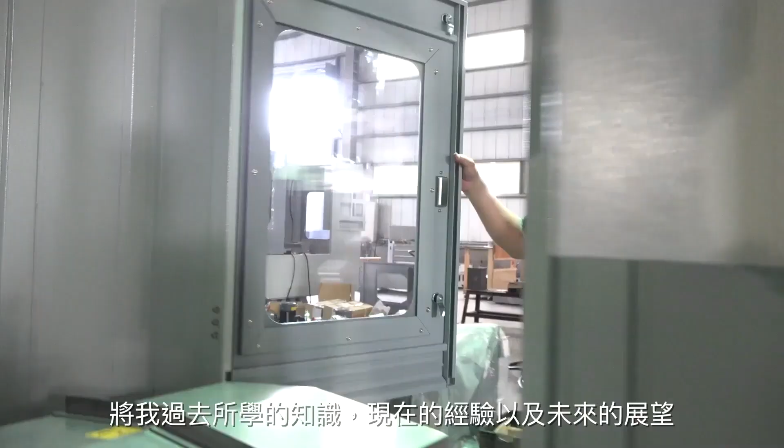I've been working with the Taiwanese partners since pretty much the day I started. John Tian is a very ingenious guy. He actually did a lot of the design and initial machinery development. Working with John has always been a pleasure. I think he's one of the people in the generation where they just roll up their sleeves and they go to work. Incredible group of people there, and we work together very well.

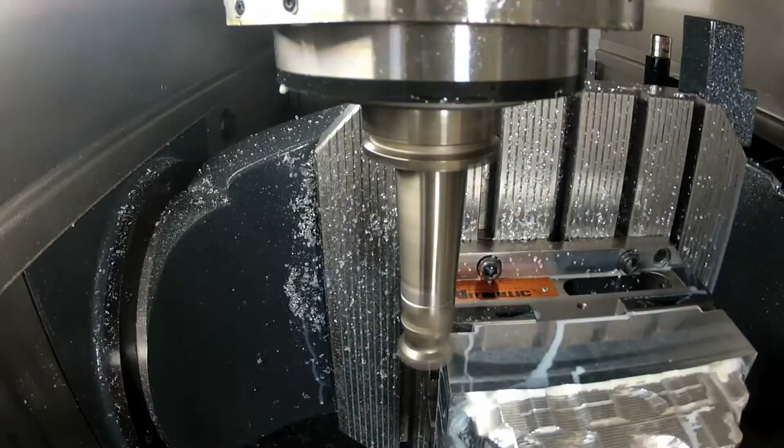What we see in the market space is the shops that are growing with technology are the ones that are succeeding in the market space. So what we've done is we've actually embedded 5-axis programming capabilities right into our control conversationally. And what that's about is basically being able to run a part complete without having to clamp and unclamp it. So 4th axis gives you the peripheral of the part. 5th axis gives you kind of the top plus the peripheral of the part. And all that's included with the Siemens platform.

So a user can step up from a simpler 3-axis machine technology, move into this 5-axis technology without having to take this large step, bringing in an external programming environment, maybe hiring staff that has to learn it, so they can kind of ease in and use the functionality built into the SINUMERIK ONE to start taking advantage of 5-axis technology without fully jumping in.

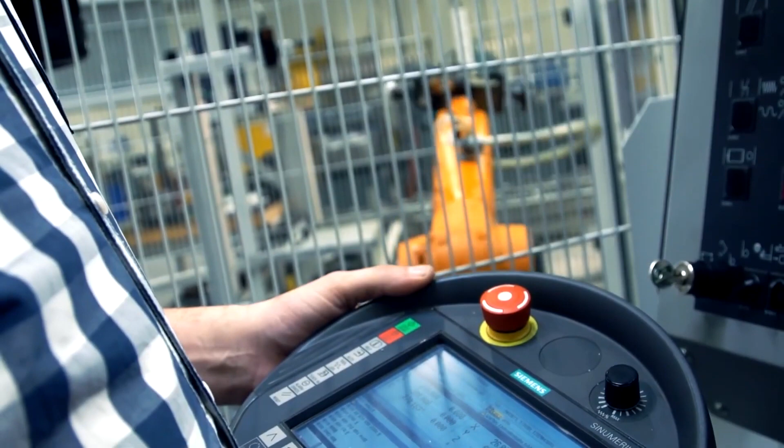The Siemens SINUMERIK ONE has some pretty clever automation functionality built into it. They have a product called Run My Robot Direct, which basically the crux of that is one user interface for both the CNC and the automation functions, which brings simplification of automation. Typically, you have the robot company with their user interface and control, and the machine tool company with their user interface and control. So the poor user has to go back and forth between these 2 platforms, like 2 different worlds and 2 different skill levels to run these things. So what Siemens brings to the table is the ability to bring that all together as one.